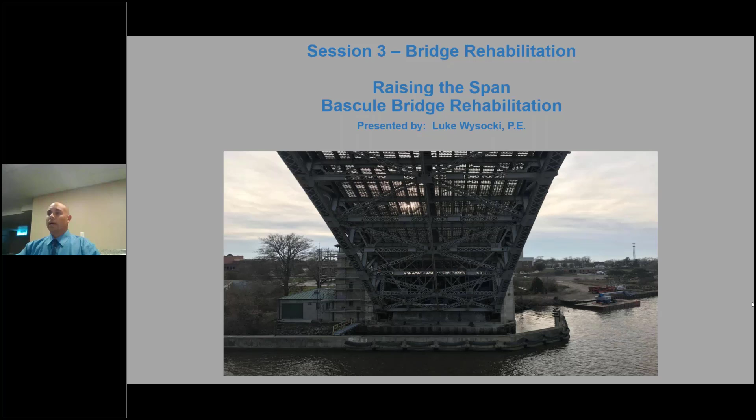Okay, thank you everyone for joining us today. As Mike said, our first presentation is titled Raising the Span, about a rehabilitation of a bascule bridge in Lorain, Ohio. The project we're going to be talking about today is project number 2 of 18, Lorain 6, 9.67. You can see where the pin is dropped on the aerial view here from Google Earth. This is the US 6 bridge over the Black River in downtown Lorain, Ohio.

To the north is the mouth of the river, right at the shores of Lake Erie. To the south, you have several marinas, a steel mill, and a large Lafarge aggregate facility, and those facilities receive a number of bulk carriers to bring goods in throughout the season.

The background on this structure: it was formerly known as the Erie Avenue Bridge. The structure was renamed in honor of former U.S. Marine Charles J. Berry, a Medal of Honor recipient in World War II. As stated, it carries 4 lanes of US 6, as well as 2 pedestrian sidewalks over the Black River in Lorain, Ohio.

ADT is approximately 14,000 vehicles, and the structure was opened in 1940, so it just turned 80 years old. The total structure length is 1,052 feet, and to the west there are 8 approach spans. To the east there is 1 approach span, and on either side of the river we've also got pier buildings where the operating machinery is housed, and the double leaf movable bascule span itself is 333 feet.

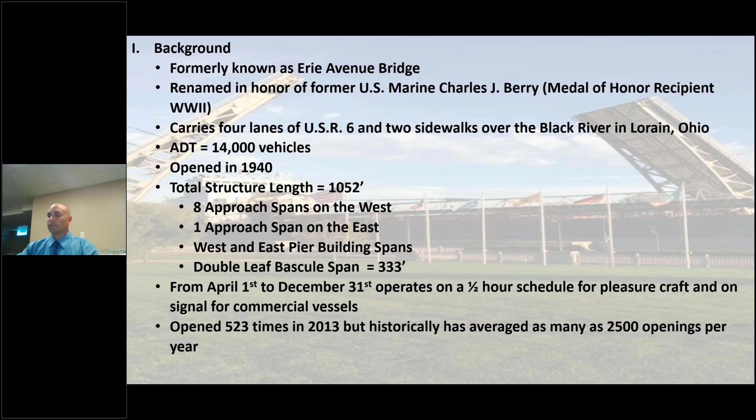So a little bit more history of the maintenance and repair of the structure. Any structure is going to require maintenance during its life cycle. A bascule bridge comes with additional maintenance due to the complex mechanical and electrical operating systems. From the time the bridge was opened in 1940 through the 50s and 60s, the only maintenance was primarily some painting of the structural steel.

In the late 1980s was the first major rehab on this structure, which included replacement of the approach span, deck, and sidewalks, as well as the electrical system, motors, and brakes. The structural steel was also abrasively blasted and painted. Then in the late 1990s, another major rehab job included work on the stone masonry on the pier buildings, a new fiber optic duct cable connecting the east and west control towers under the channel, and a new maintenance building. Finally, in 2012, the east and west counterweights were adjusted to balance, which brings us to our current project today.

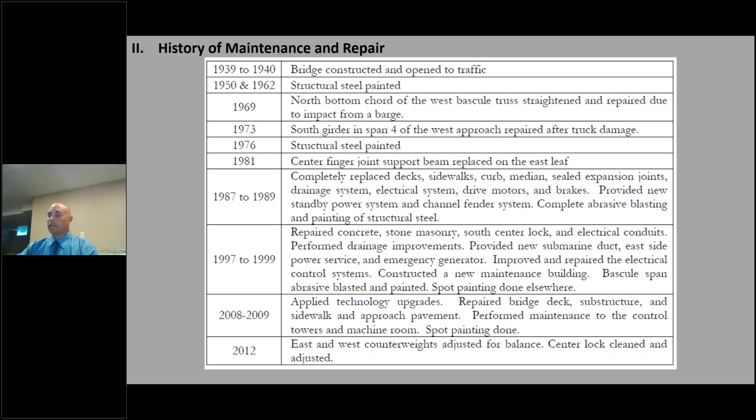For project 2 of 18, ODOT is the owner and was charged with contract administration. The department hired HDR for construction engineering and inspection, as well as submittal reviews. There were hundreds of submittals on this project for replacement of the mechanical and electrical operating systems, requiring a great deal of technical knowledge and expertise to review. Hardesty and Hanover was the designer of record and was invaluable during the project, with over 200 RFIs submitted, reviewed, and answered as construction proceeded. And finally, last but not least, Ruhlin Parham joint venture was the prime contractor for this project.

The purpose of this project was to address structural deficiencies, to provide a minimum 50-year service life for the structure and machinery, as well as a 20-year service life for the electrical and operating systems.

Part of the structure work included overlays on the approach span decks. The existing approach spans are comprised of a 4 1/4-inch galvanized steel grid with a 6-inch superplasticized dense concrete fill. We did hydro demolition of 2 inches and replaced it with an SDC overlay. The plan also intended a 1 1/4-inch hydro demo and SDC overlay on the sidewalks. However, that was unsuccessful - we kept punching through with the hydro demo equipment, so we ended up doing some sidewalk patching with latex modified concrete.

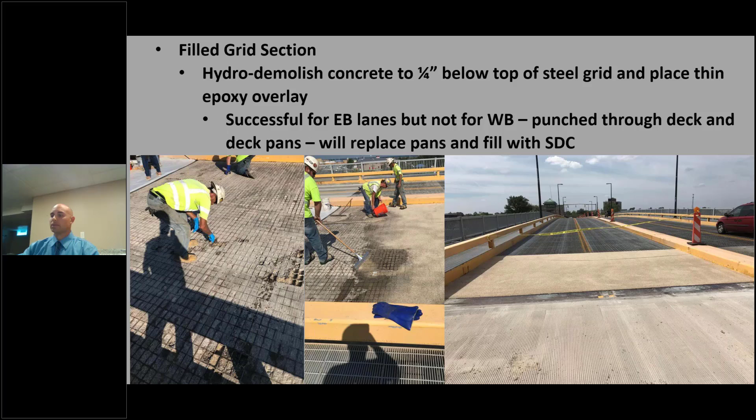As mentioned, the intent of the project was to bring the bridge up to today's standards for live loading. Some of the structure strengthening on the approach spans included strengthening the floor beams with angles placed at the top and bottom of the webs. This involved a very tedious process of drilling a large number of holes to bolt these angles to the floor beams.

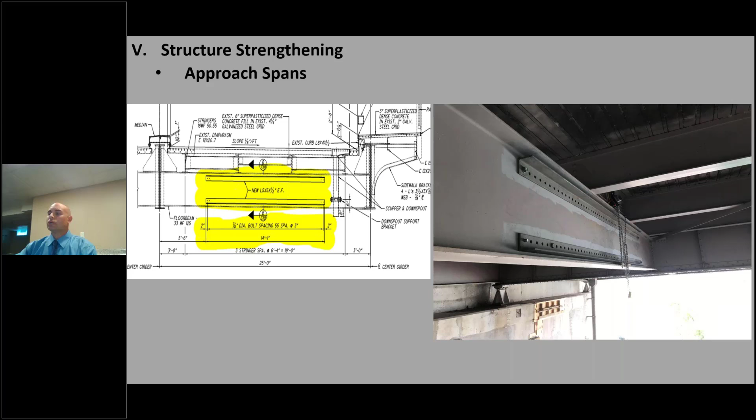Some of the other strengthening that took place was on span 8 and the center girder, which included adding new cover plates and splice plates to the top and bottom of this girder.

Finally, there was some structural steel strengthening out in the bascule spans. This was definitely one of the more challenging aspects of the work. You can see from the photos all of the work taking place from barges on the river, and we were certainly at the mercy of Mother Nature there. Being near the mouth of the river at Lake Erie, the river levels fluctuated greatly with the lake as well as wave conditions, so there were a lot of days where it was difficult, if not impossible, for this work to take place out over the river channel.

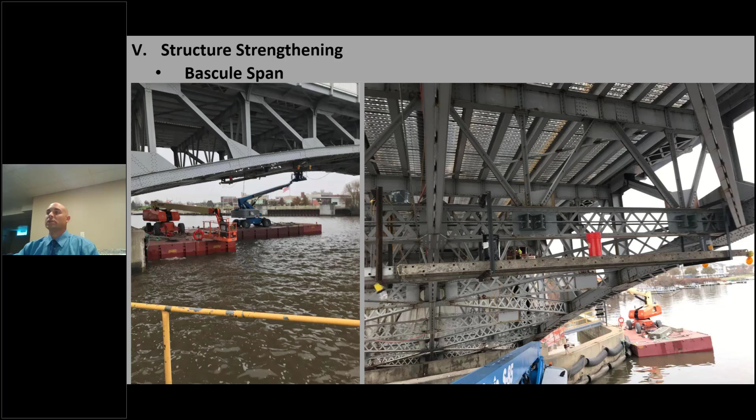As mentioned, this is a historical structure. The control towers and pier buildings have sandstone tiles placed on the exterior. Part of the work was architectural stone repairs, including removal and replacement of stones, patching with a Jahn mortar, profiling to remove delamination, and finally chemical cleaning to remove an existing sealant and give a clean, finished look to the stone.

In the next photo here, you can see some of the architectural stone repairs in progress. The photo on the left shows the extensive scaffolding required to access the work, and on the other control tower on the right, you can see some of the profiling work in progress.

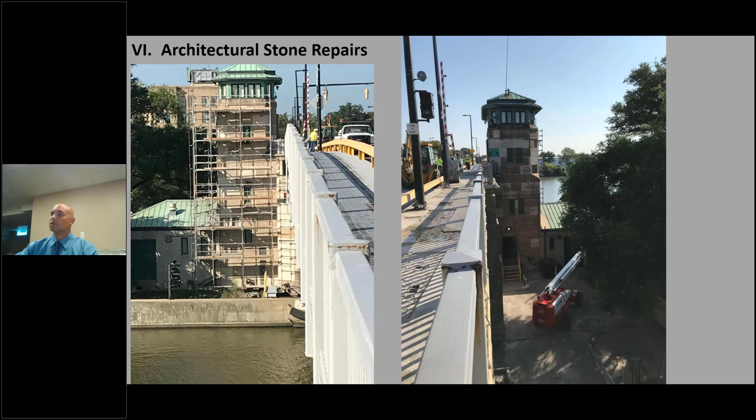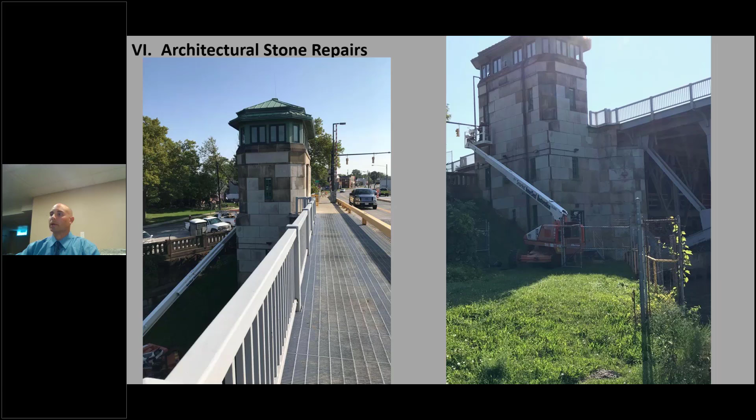Here's another view of the control towers with the masonry profiling work completed, prior to the chemical cleaning of the stones. We did chemical cleaning to remove some of the existing sealer placed in the late 1990s, and also to remove impurities and deposits from the air that give it that dirty, tarnished look. These photos were taken before the chemical cleaning, but the intent between that and the profiling was to give the structure a uniform look and preserve the historical integrity of these sandstone tiles.

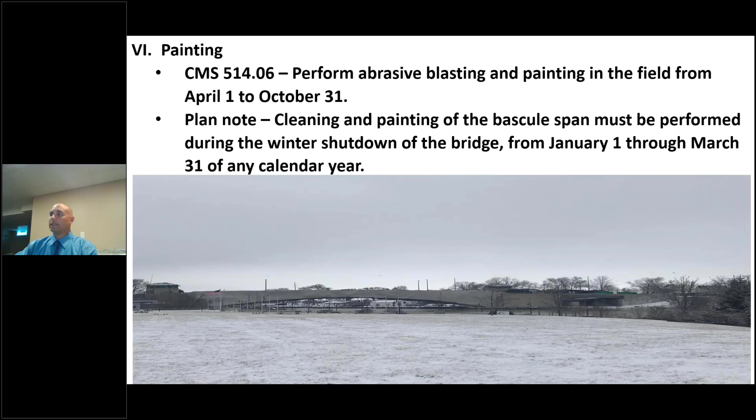Another unique aspect of this project was performing structural steel painting during the winter months. Matt will get into some of the challenges with this in his presentation. The intent here was to take advantage of the winter months when there's no shipping on the Black River, but still maintain vehicular traffic. In the past, when the structure was painted, the Bascule leaves would be raised, closing vehicular traffic so river traffic could be maintained. This is very disruptive to the general public because it's a long detour to get to the other bridge that crosses the Black River. So the decision was made to do the structural steel painting during the winter months.

Now I'll get into another unique aspect of this project, the temporary operating system. The intent behind this was to maintain operation of the bridge during construction. In the past, when mechanical and electrical work was done, the Bascule leaves were raised and locked into the open position so river traffic could be maintained, which was very disruptive to the general public. So this project was designed with a temporary operating system instead.

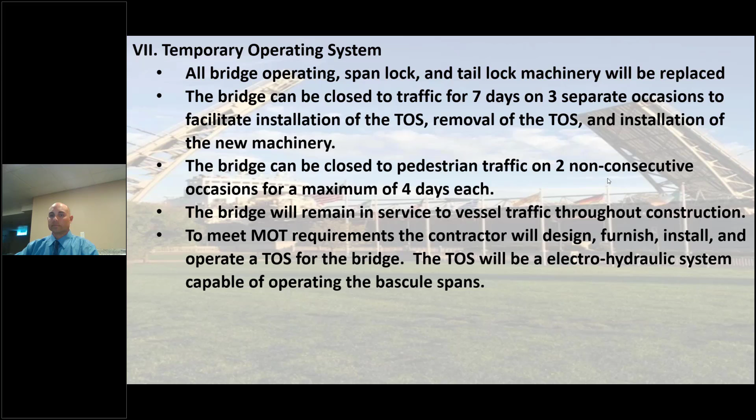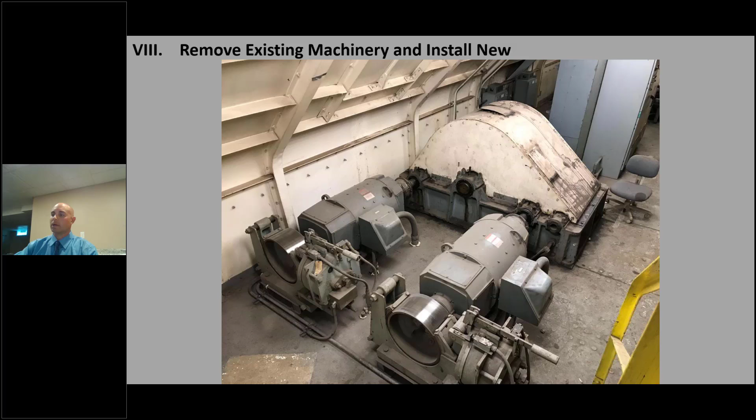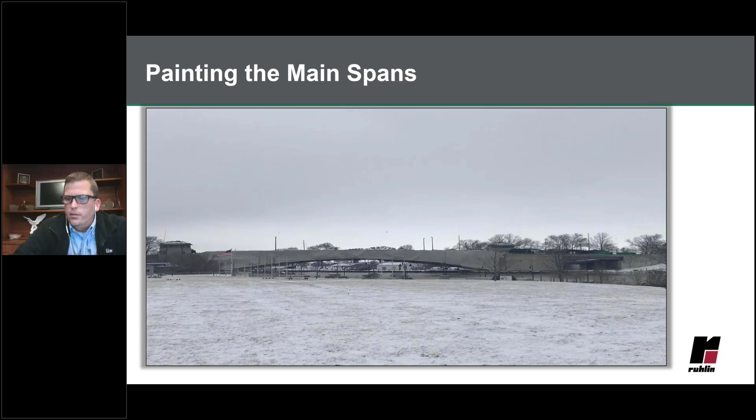Because of that clause that we thought we might have to open the bridge with 12-hour notice, we initially tried to do the containment so it would be operable with a bridge opening. But that was just not possible, and plus there's a whole balance issue with trying to do containment. So we were able to work with the Coast Guard and the local businesses, and for most of the closure period, we were assured that there would be no bridge openings.

So was the painting a challenge? It absolutely was. Did it go as planned? Absolutely not, but I will give it to the painters. We were able to do this with some complex sequencing and a lot of pushing, but it did get done.

The next apparent challenge was the installation of the temporary operating system. And if this wasn't a challenge enough, we had to get the TOS installed, integrated, and operable by the same deadline as the painting. So when the painting was off to a slow start, we knew on the back end there'd be less time to get the TOS installed. That was... wasn't a lot of fun. Luckily, us engineers don't worry about that stuff too much.

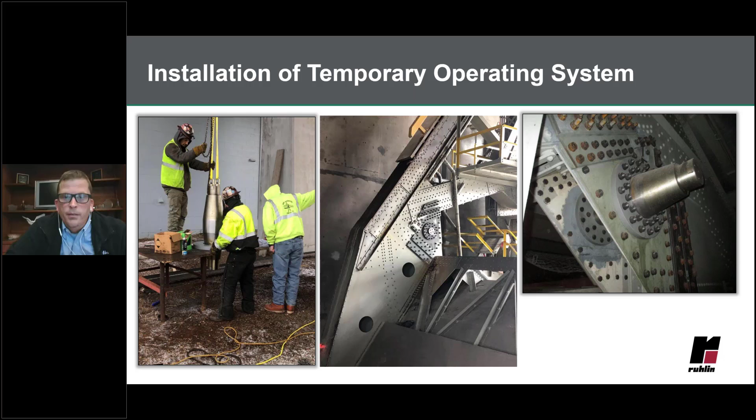This is the middle picture. It shows the trunnion in place in the actual bascule truss. Part of the evolution of this design is we actually had to add more reinforcement to the truss. And with more time, the TOS itself would be just its own standalone topic for one of these presentations.

So was the TOS a challenge? Definitely was, but we have a good team here at Ruhlin, and even in the condensed schedule, we were able to pull it off in time.

And the last of the obvious challenges was the machinery alignment. At the time we were bidding this job, I was actually on another Bascule bridge, and we were having a monumental struggle with the open gear alignment. So anytime you're aligning new components to old components, there's always a challenge, always a risk.

And there's always a running joke when you struggle with the alignment on these machinery components. Well, it's a joke - I don't know if the owner always finds it funny. Like, don't worry about getting exact alignment, it'll eventually wear itself in.

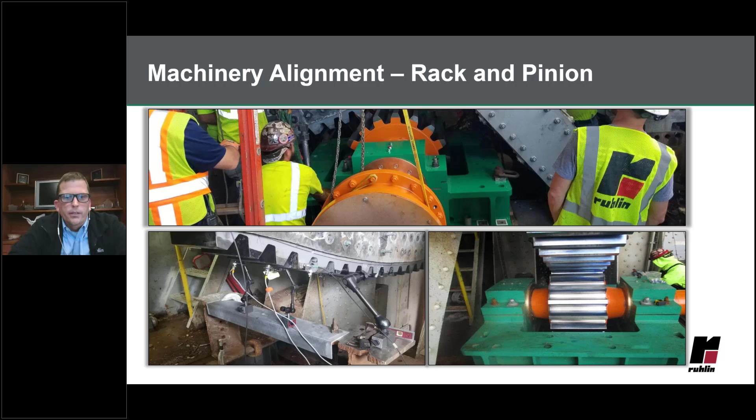And for the existing span locks, they were definitely well worn in. These were a challenge in the fact that we were connecting two separate structures with a new piece of machinery.

And over the course of the last 40 years or whenever these have been changed, there were quite a lot of iterations. So this is just another example of the risk the contractor takes. You really can't tell just how bad things are going to be until you rip the old system out.

We had a lot of iterations of changing rear and front live loads. And the old system actually pulled the leaf down into contact, which we were not allowed to do with the new system.

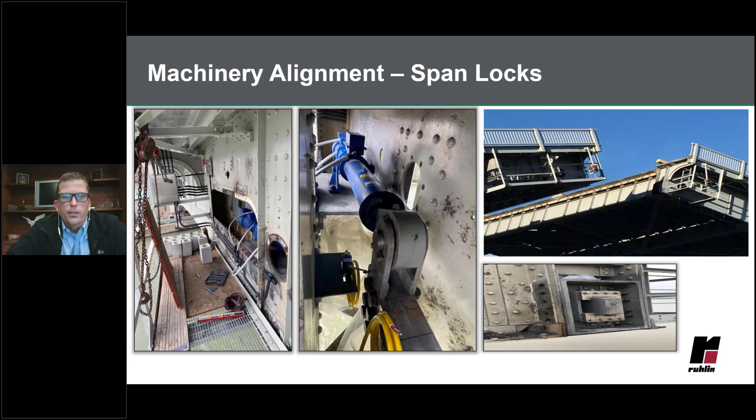And there's just a few more pictures of some of the machinery alignment. The left is a picture of the span lock. In the middle, it's just an interesting picture of one of the primary reducers. And that has nothing to do with alignment, but that machinery room cover that you see on the right was quite the challenge. So all these challenges were fairly obvious going in, and they were a challenge.

The alignment of this machinery actually went better. The design was very good. It used a primary differential reducer, which was much more alignment friendly when compared to some of the other designs we've used. And we also employed Bob Polsett from Stafford Bandlow Engineering, which made this process go very well.

So 3 obvious challenges, all were a struggle to some degree, but went well. But the less obvious challenge that you cannot identify from just looking in the plans was we had no idea how we were going to get each of these components into position.

Now, none of these components are that big to say setting a bridge girder. The racks were 22 feet long and 12,000 pounds. The secondary reducers weren't huge by any standard - they were 6 feet tall and weighed almost 20 tons. And we routinely handle things this large or larger, but how to get these into the point of installation became quite the planning session.

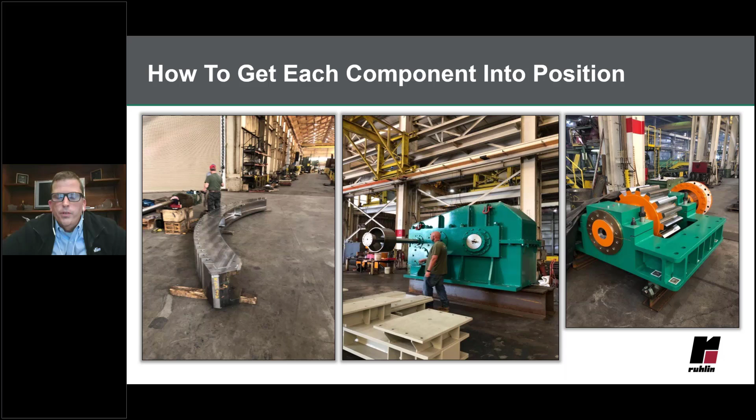We determined there were 2 possible routes to get these components to where they needed to go. First one was through the pier house and across the counterweight pit.

So they had to go through the double doors in the picture on the left. Then once through the double doors, drop 25 feet down to the counterweight pit floor. And then across the counterweight pit floor to the trunnion tower, up another 25 feet through the laterals of the trunnion tower and then into the machinery room.

All this had to be done with no crane and inside of a room that's periodically completely filled with 2,000 tons of steel and concrete counterweight. So we quickly deemed this path impossible.

But with the lack of road closures and trying to do this with just traffic stops, we figured we'd have 15, 20 minutes, half-hour tops to try and bring in a crane, and still we had to struggle to get underneath the bridge. So we abandoned this idea pretty quickly and pretty much determined that the impossible path was the way to go.

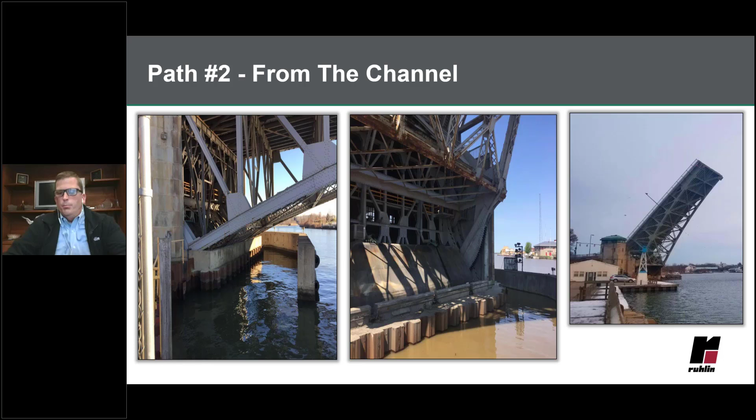So this turned into quite the planning session. Many ideas for how to get the machinery through the pier house. We thought of an upper track system using Hillman rollers to mighty mini jacks on a lower track system, a ramp down to the counterweight pit floor, highline systems, chain hoist, air tuggers, and a conveyor belt system.

We even came up with a temporary false work rail system, kind of like a mini roller coaster inside the pit, a rolling gantry on the pit floor, and an overhead crane. All those had problems, and once you got it to the floor, you still had to move it.

So we thought about maybe industrial forklifts or air dollies. Then we had an idea: maybe we can just sub this work out. So we called in a specialist in industrial equipment moving and brought them out to the site. They looked at it for about 20 minutes and told us they had no idea how they would do it.

So that was over. Then we thought maybe we could get some specialty equipment, particularly equipment named after animals. We checked the spider crane and something called a platypus, which was some compact tracked container mover our superintendent saw somewhere. So we tried all of these things, a combination of all of the above, but no matter what we tried, none of these things could solve all the problems we were looking at.

So this went on for a while, and we were stymied for a while. We even got bonus time to be stymied, as the project had a fairly significant delay trying to find a domestic manufacturer for the brakes. But we did finally have a breakthrough and the ingenious and highly technical solution.

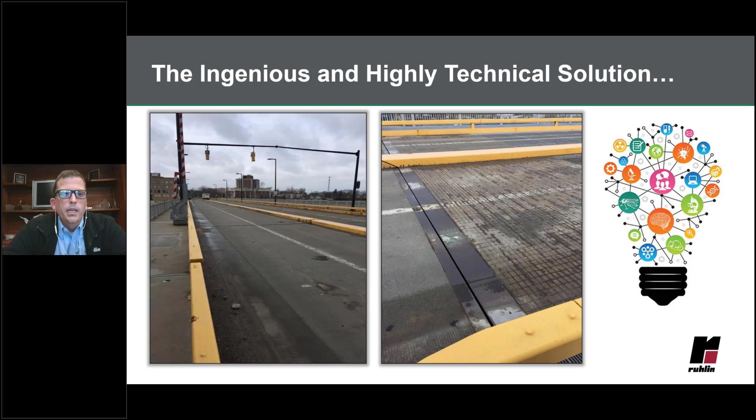Let's cut a big hole in the road we just repaired. I'm not totally sure who came up with this idea, but since I'm the only one speaking today, I'm going to take full credit.

Even this idea was not without its problems, as the machinery room, as Luke mentioned, is not directly under either of the spans. It was right on the joint, the transition from the lift span to the fixed span. So this required quite a lot of removal of the steel we just repaired and painted. But we were pretty happy that we finally had a working solution.

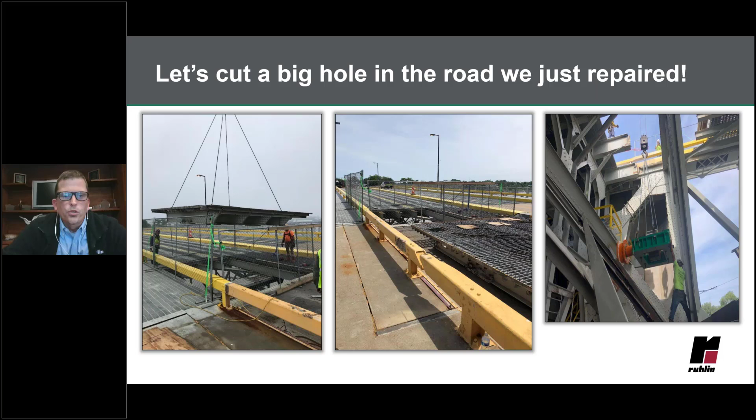And here is a few pictures of the rack placement from the hole in the roadway.

And just getting the racks into the counterweight pit wasn't actually enough, because there was a lot of work afterwards. We pretty much left it up to our iron workers to do a lot of rigging and a lot of different moves with different rigging setups. So I'll give them most of the credit.

Once we got it to the floor, at least for the racks, they were able to get the stuff into position in very short windows between bridge openings.

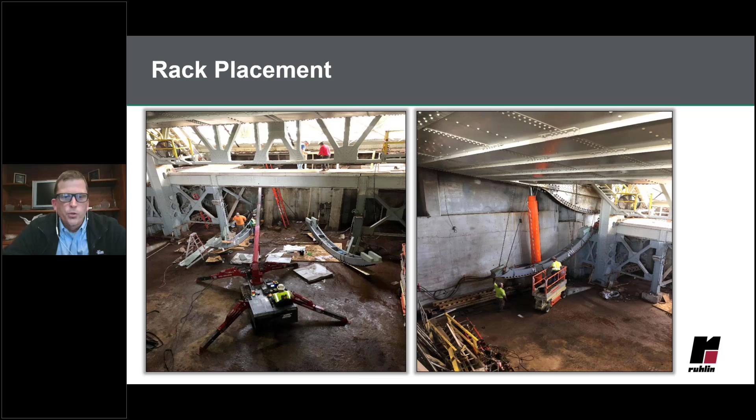And the tightest fit that we had was for the secondary reducers. We had about 1/16 of an inch clearance to get these into the hole. And while I make fun of this solution as not glamorous, it did create quite a bit of engineering.

Because even once they were into the machinery room, they were all offset from the center line. So moving a 20-ton reducer with no overhead crane is much easier said than done. There was a pretty complex system in the machinery room with Hillman rollers and a lot of complex rigging.

And then lastly, this was the main operating machinery going into the machinery room.

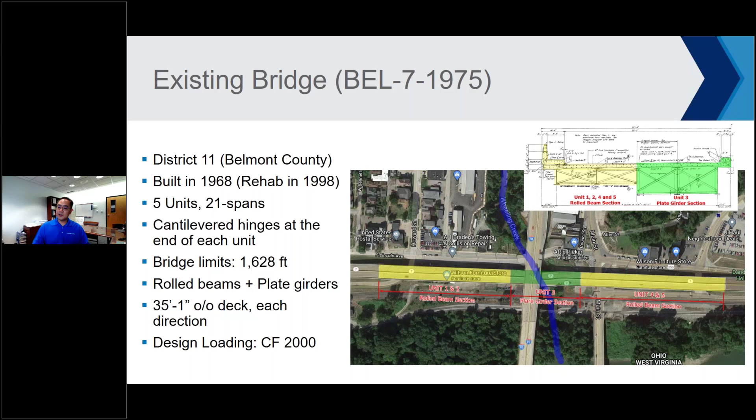The Belmont 7 Bridge project has been carried out in 2 stages. First, we did a temporary pier cap strengthening design until they are replaced with a new pier cap or the bridge is replaced. Second, we studied the bridge rehab and replacement.

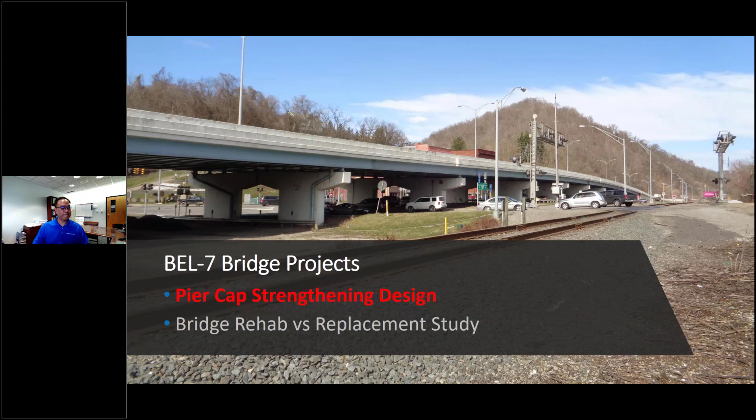Today we'll talk about the first topic, the pier cap strengthening design. After more than 50 years of bridge service, many of the pier caps were found to have serious cracks and deterioration. Some pier caps have a very large area of delamination and spalling, and abutments have a tilting issue. Severe deterioration was also found at the top of the pier bearing seat. So ODOT decided the pier cap needed to be repaired.

This is the typical vertical cracking happening in most piers. This is Pier 8 eastbound, looking at the rear side of the pier. As you can see, the bad concrete area was already marked up on the pier cap from a previous inspection, so we could easily see the limits of the concrete delamination.

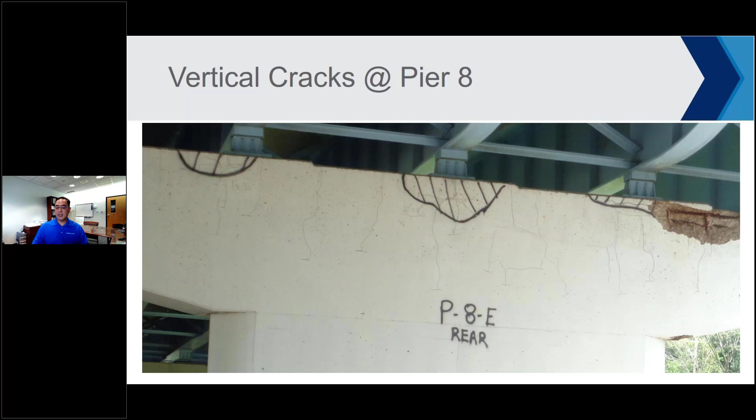This is Pier 11 westbound, looking at the front side of the pier. Same as other piers, there are lots of vertical cracks on the pier cap. This is Pier 16 eastbound. These vertical cracks were found to be growing over the years, and this vertical cracking was the main reason we needed to replace the pier cap.

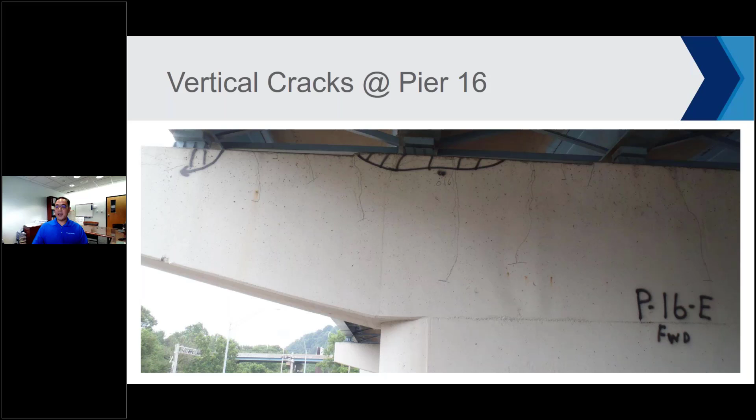So they asked us to study several options for short-term pier cap repairs and prepare the construction plan as soon as possible. ODOT selected 6 piers for expedited repair: Pier 8, 11, and 16. There was also a transverse crack along the face of the pier cap, so we could not apply pre-stress force under this condition. We'll talk about in more detail later how we handled this problem.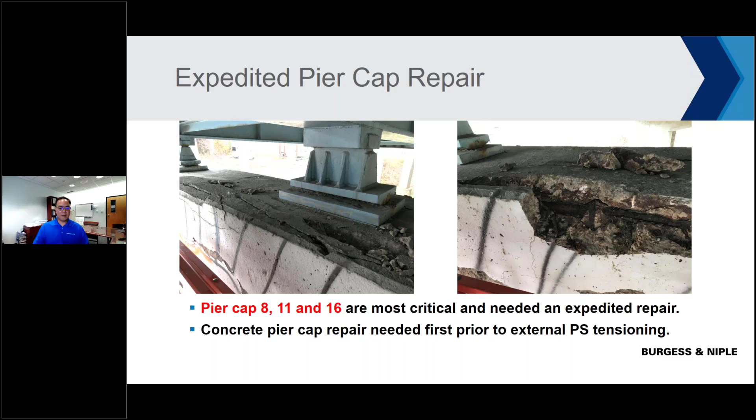We considered supplementary support members taking care of most of the dead load and live load, so we tried to minimize using the existing pier cap capacity if possible. We proposed 3 different types of temporary support options: steel frame type support, steel beam type support, and external post-tensioning support.

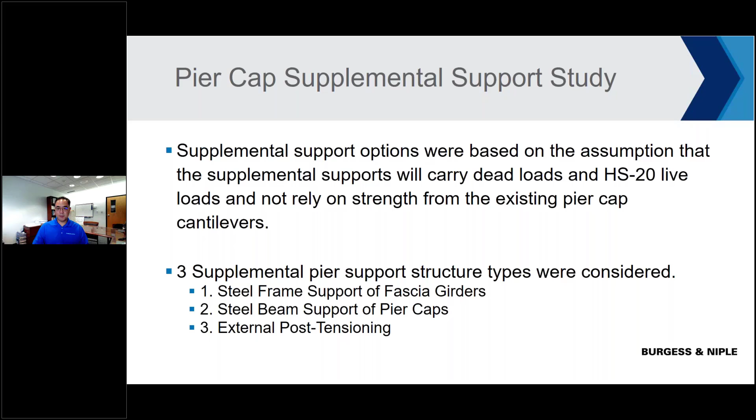This is the first option we propose for temporary support. It's frame shaped and supports the girder adjacent to the existing pier. We put two 14-inch H-pile columns on top of the pier footing, and then place the wide flange steel beam to support the existing fascia girder.

One of the benefits of this method was it does not need to repair the existing pier. However, this method changed the support location from original design, so it can cause tension stress on the top of the deck slab.

Another option was a bigger size steel beam with support brackets. We can attach the bracket on the pier column to support this beam. It uses fewer members than other methods, so it's relatively faster construction, but because of the heavy support beam, it could add serious extra dead load on the existing pier. Also, it's not easy to drill the hole without cutting the pier column reinforcement, so that might be a problem.

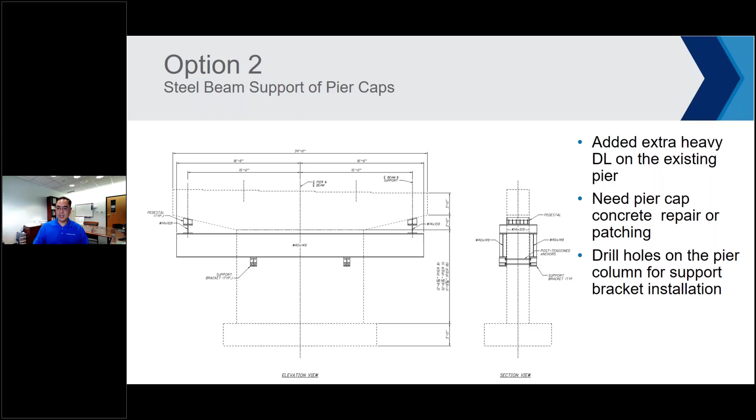The third option was external post-tensioning, and ODOT selected this method. They basically installed an anchor plate on each side of the pier cap and applied post-tensioning force on the existing pier cap using 6 high-strength post-tension bars, so it can increase the existing pier cap capacity. This method resulted in the least dead load on the existing pier when compared with the other two options.

Based on the engineering cost estimate for this method, total construction cost was about $300,000, and the award amount was $228,000.

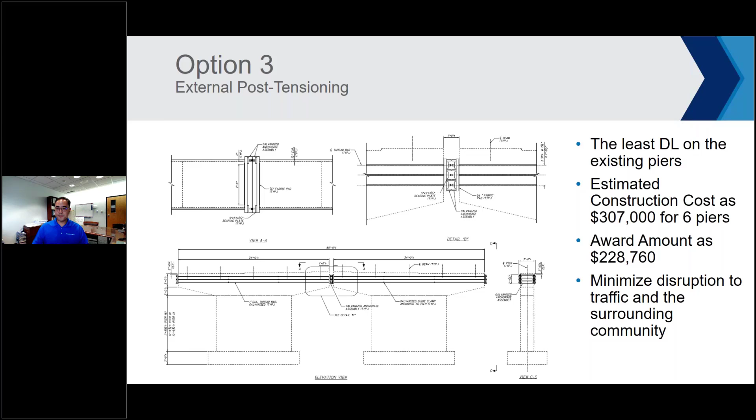Existing bridge analysis: to calculate the initial stress force, we had to know how much dead load and live load force were working on the existing structure. So we modeled the superstructure using Midas and calculated all the reaction forces at each pier. Based on this reaction, we did a quick check for the bearing capacity, and it seemed over 90% performance ratio, which was okay.

We already knew that many Asian countries like South Korea, Japan, and China have been using this type of construction for a long time. So we thought it would be very easy to find a similar case here, because this situation could easily happen here, and this method was not that difficult or a special thing.

So before we started work on this project, we looked up the ODOT archive or historical project database to see if we could find a similar project like this, but unfortunately, we couldn't find it.

Generally, in Asian countries, as design live load became heavier over the years, bridge owners wanted to upgrade existing structures for higher performance. So in such cases, they have been using this type of method for pier cap retrofit.

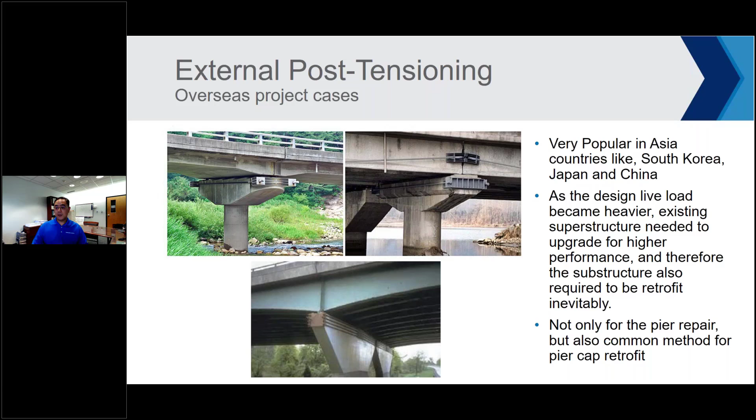This screen is a rendering image to explain how external post-tension bars work on the pier cap. Basically, you install the anchor bracket or anchor plate at each end of the pier cap and then post-tension with a high strength bar or strands.

One thing I noticed is that they use a saddle bracket at the top of the pier cap, so it could push more pre-stress force onto the existing pier cap. They also use this method sometimes for temporary conditions, but sometimes for permanent construction as well.

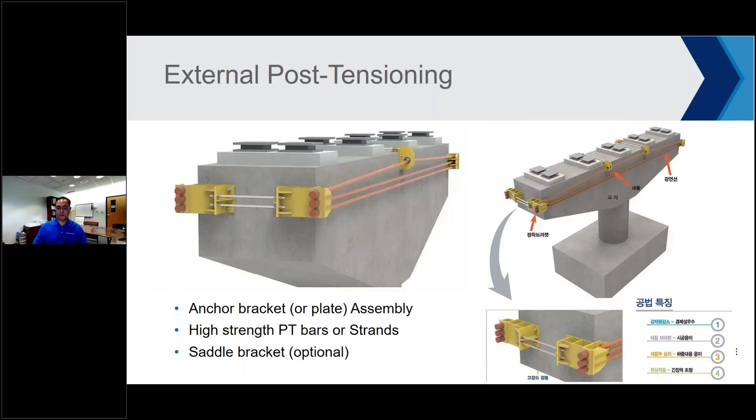So I did some internet research and found a similar project in the US. This is the George Wade Memorial Bridge located on I-81 over the Susquehanna River in Harrisburg, Pennsylvania. The bridge was built in 1969, and the total bridge length is 5,200 feet.

In early 2000, PennDOT figured out the pier cap reinforcement was not enough to handle the current traffic load of 32,000 vehicles per day. They also found vertical cracks on the pier cap, the same as the Belmont bridge. So PennDOT decided to repair this pier cap structure.

The retrofit work was done in 2010 by Dywidag-Systems International. They used 6 post-tension bars with a diameter of 46 millimeters. They retrofitted a total of 68 piers, 34 piers each for northbound and southbound.

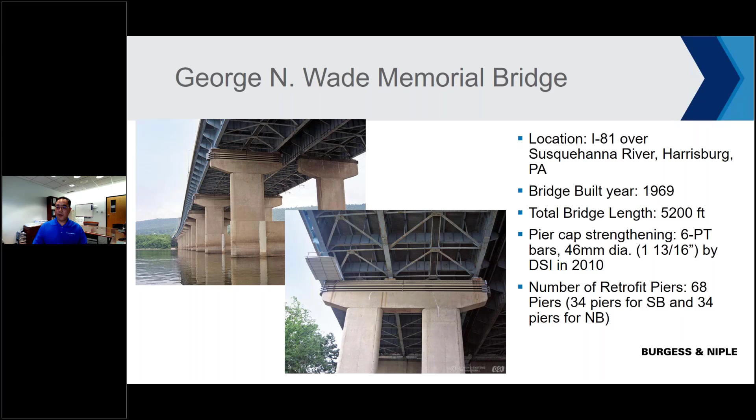Now let's talk about the design procedure. We calculated all the dead load and live load reaction from the existing bridge and decided the size and number of post-tension bars. We also created the existing pier cap model using Midas and applied all the loads.

Then we checked the pier cap concrete stress. Once it passed, we checked the stress for the post-tension bar and then the angle plate assembly.

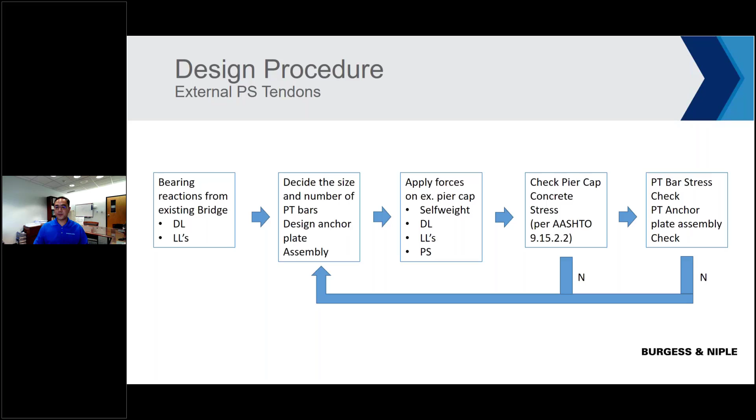After calculating the reaction and the post-tension force from Midas, we imported all the member forces into the spreadsheet. We created a macro to run with the code-checking spreadsheet and then calculate the final concrete stresses.

In this spreadsheet, it basically checked the existing concrete factored moment and the concrete service stress, as well as the post-tension bar tension stress. For concrete stress checking, we have to check all 3 different cases of concrete stresses per AASHTO code.

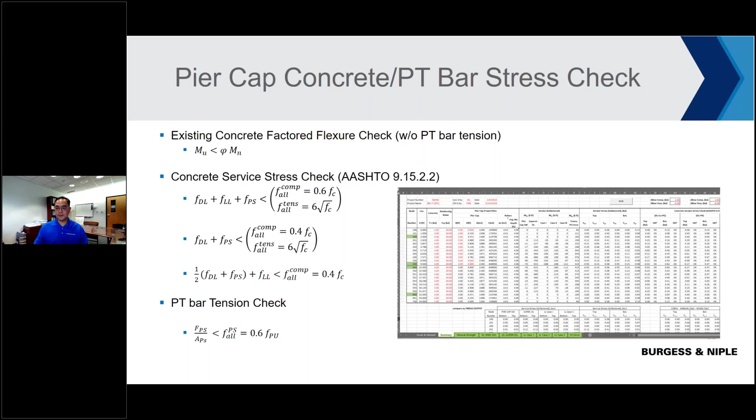Once we finished the pier cap concrete stress, we had to check the anchor plate assembly next. We took a middle section of the anchor plate, shaped like a cantilever with a T-shaped section, and then applied half of the prestressed force on it.

This was a simple equation, so we just calculated it by hand. Finally, we calculated all the anchor plate stress at the top and bottom, and verified that everything was under allowable stress.

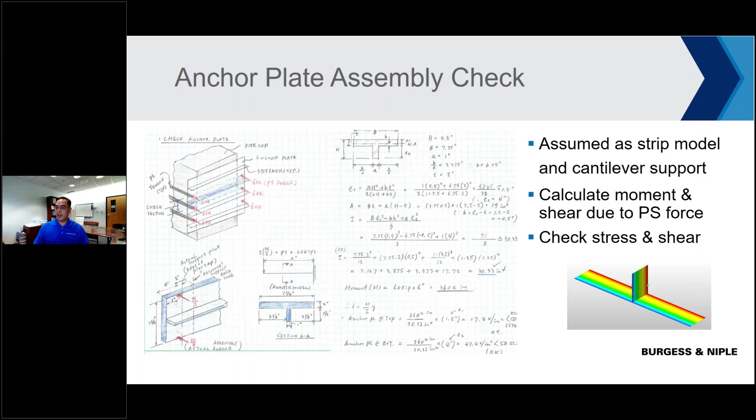In order to draw this diagram, we investigated the entire pier cap to verify if there were additional delaminated areas. Some of them looked good with no marks, but when we tapped them with a hammer, we found some additional delamination, so we had to include this in the concrete patching diagram.

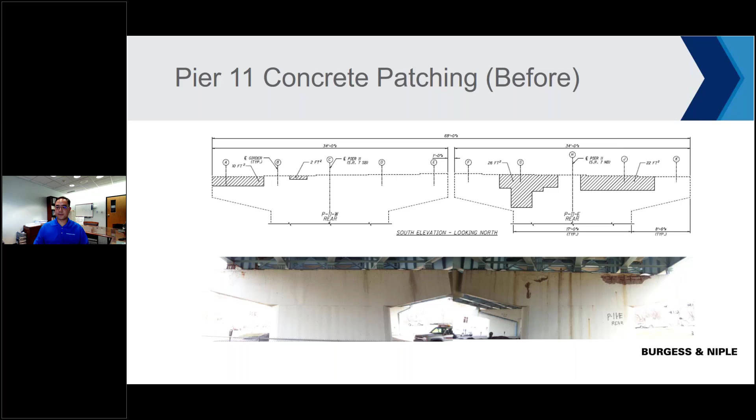Another thing we found at the bridge site was that the end of the pier cap concrete surfaces were not flat and smooth. Mostly the gap was between 1/16 inch and 1/4 inch, so we provided some detail in the construction plan.

If the gap was greater than 1/16 inch, then the concrete shall be ground to make a smooth and nice flat surface.

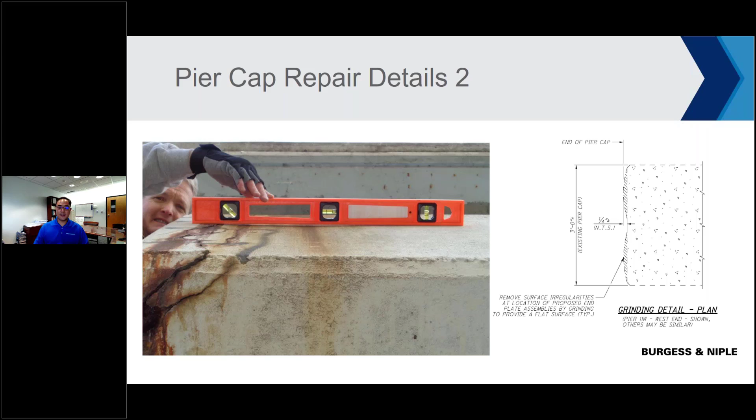Even though we ground the pier cap concrete surface to make it flat and smooth, we used a fabric pad for better contact between the end plate and the concrete surface. The pad thickness was 1/4 inch, and the material was the same as a typical preformed bearing pad per CMS.

Regarding the post-tensioning bars, we used 3 high-strength post-tension bars at each side. Grade was 150 KSI steel, 1 inch diameter, all-threaded bars. Total final jacking force was 60 kips.

First, we used 15 kips for initial jacking force for each bar, and then finished up the jacking force at 60 kips. So we had 2 incremental jacking stages.

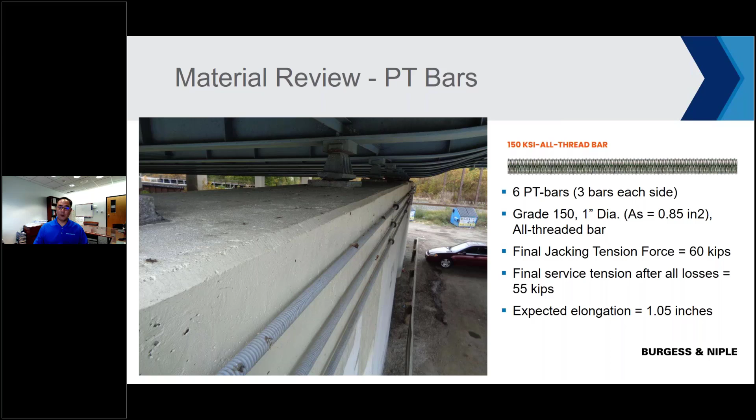We installed a bar clamp to prevent sagging due to the post-tension bar's self-weight or possible vibration. This was a typical clamp used to secure pipe to a wall. The rubber bushing was a little bigger than the post-tension bar, and the clamp was made of stainless steel.

We used 2 of these clamps along each post-tension bar. Also, we used a 3/8 inch diameter anchor bolt to secure this clamp.

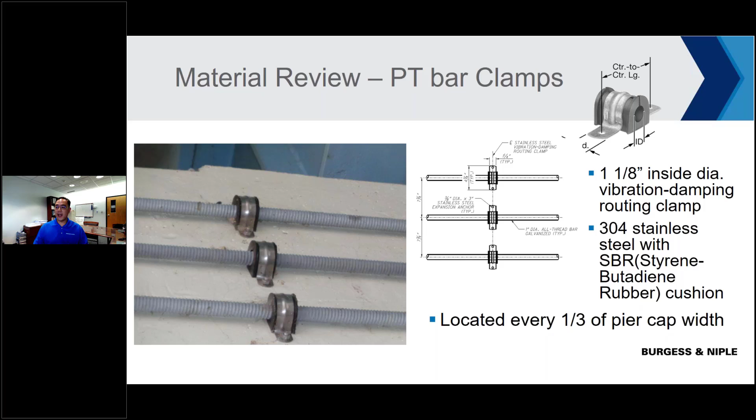Another design challenge was we only had a 1 foot gap between the end of the pier cap, so we had to design the anchor plate assembly to be less than 6 inches for each side. We ended up designing it to make it work, with 1/2 inch clearance between the stiffeners. So, to be honest, we were worried about it.

The contractor had to fabricate this assembly exactly to the plan and install it precisely because the pieces were almost touching each other. When we revisited the bridge site after construction, the contractor did a really good job, and we were very happy with that.

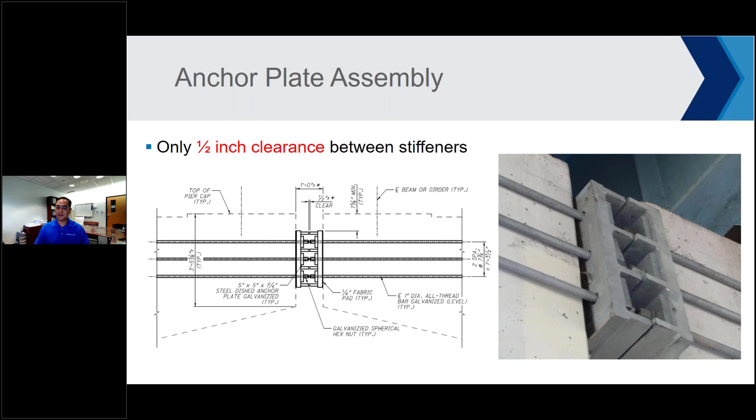So this is the picture. All the installation has been completed for Pier 8. And this is Pier 11. And this is Pier 16.

As you can see in the picture, it was a very simple design and a very effective repair method. It was also relatively easy construction. So I guess this was the perfect solution for this pier cap repair problem. In this project, we used this method as a temporary repair for the pier cap, but I think we can definitely use this method as a permanent method as well.

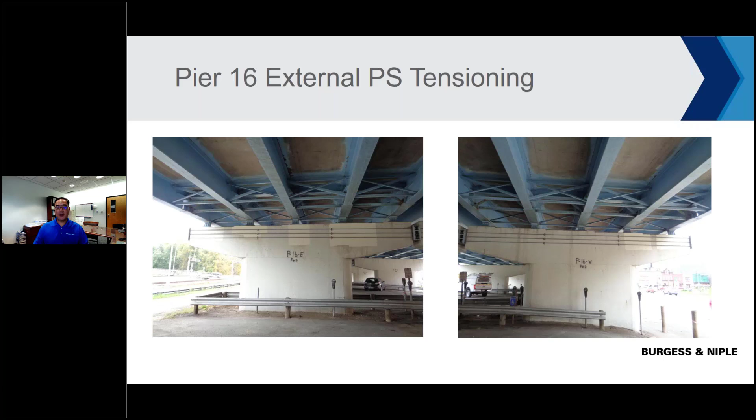One more thing we'd like to share is a reference report. This is the FHWA technical report titled Report on Technique for Bridge Strengthening. I think it was published in early 2019, so unfortunately we could not see this report during our project. But basically it talks about how to calculate the capacity and the load rating factor for existing and strengthened pier caps. So this report might be helpful for bridge engineers who use this pier cap strengthening method, or load rating analysis for this type of pier cap.

So this is all I prepared for today. I know it's a very short time, so I definitely did not show everything, but if you have any questions, you can send me an email. That is the best solution.

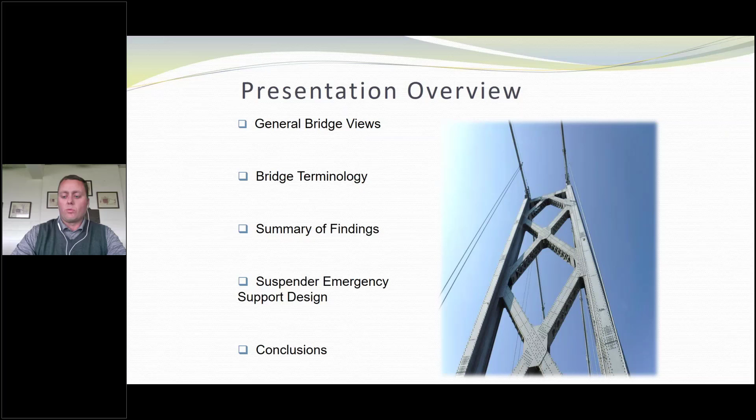There's a couple mug shots of me. I'm the KYTC District 9 bridge engineer for Kentucky. For those of you who do not know where the Simon-Kenton Bridge is, it crosses the Ohio River and connects the city of Maysville to Aberdeen, Ohio. This is roughly located 75 miles upstream, southeast of Cincinnati.

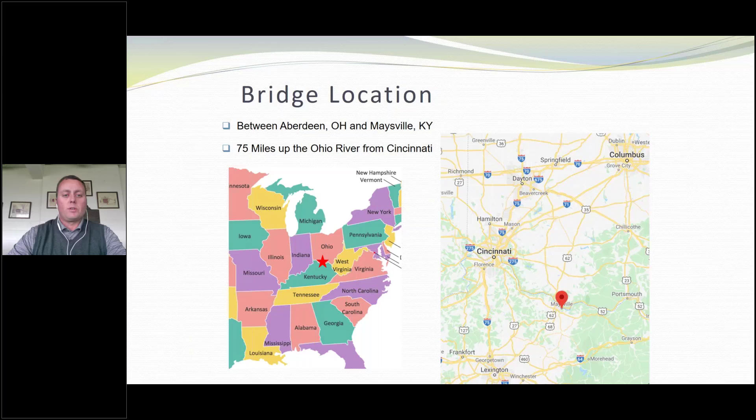A little bridge history: the Simon-Kenton Bridge is a suspension bridge built in the 1930s. Its designer and the fabricator's shop drawing personnel have ties to the Golden Gate Bridge and the Brooklyn Bridge. So it's a historically significant structure.

The navigational span is 1,060 feet. The overall length of the bridge is just under 2,000 feet. The towers extend vertically approximately 125 feet above the bridge deck elevation. It's a narrow 2-lane bridge with a very narrow sidewalk, so narrow in fact you do not walk side by side on this structure for fear of getting taken out by a truck mirror.

The next slide we have here is a typical elevation view, upstream of the structure. On the left you can see Maysville, Kentucky, and on the right you'll see Aberdeen.

It is a fracture critical bridge, and we share this bridge with Ohio, but Kentucky is responsible for the maintenance, the inspections, and letting out contracts for the structure. This structure is so large we do not inspect it with our in-house forces; we consult out, and that's where Michael Baker and Jason Stith come into the picture. So it's actually consulted out every 2 years for fracture critical inspections.

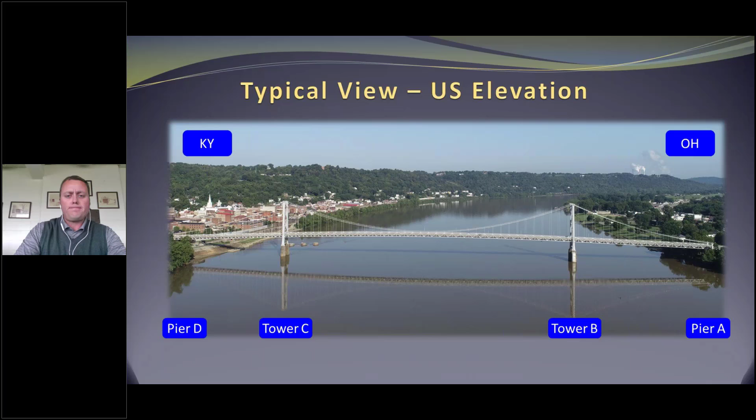The next slide we have for you is labeled with some terminology on the structure. You've got the main cables that drape over top the towers, and then the suspender cables, or secondary cables in question, are actually the vertical cables that drape over top of the main cables and connect to the stiffening truss onto gusset plates on the outboard and inboard faces of the stiffening truss.

One important thing from this photo, it's hard to tell, but it's important to note that the suspender cables form one continuous loop. At the top of the cable it goes over the top of a cable band, so it is not two individual cables, it's one cable. If you cut it in one location, you essentially lose the entire suspender. The suspenders are considered fracture critical. Loss of one of the suspenders means the stiffening truss is not capable of carrying the load between suspenders, so loss of one of those could result in partial failure or complete failure of the structure.

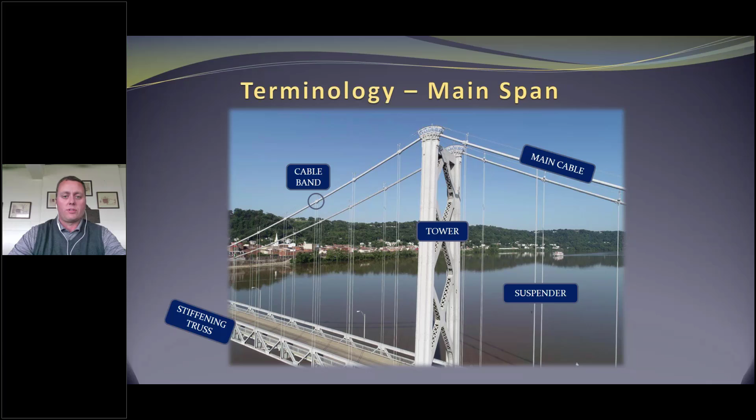Our suspender cables essentially consist of individual wires spun together to create a strand. In our case, for our suspenders, we have one core strand in the middle with 6 separate strands spun around it. So this just gives you a little bit of a visual of what we've got out in the field.

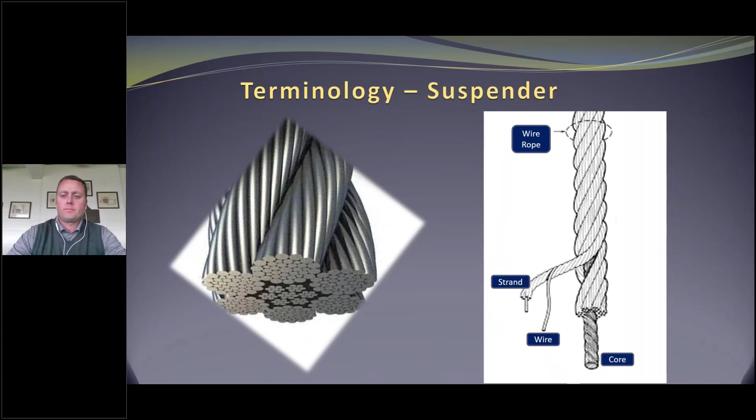A little bit of history behind the bridges: up until 2017, the suspenders really didn't have any major notable defects, just minor defects. In fact, the suspenders were considered in satisfactory condition, with a note that up until the 2017 inspection, at isolated locations, there is pack rust between the housing angles and suspender cables at the stiffening truss connections. The suspender cables also exhibit surface roughness and corrosion at these locations.

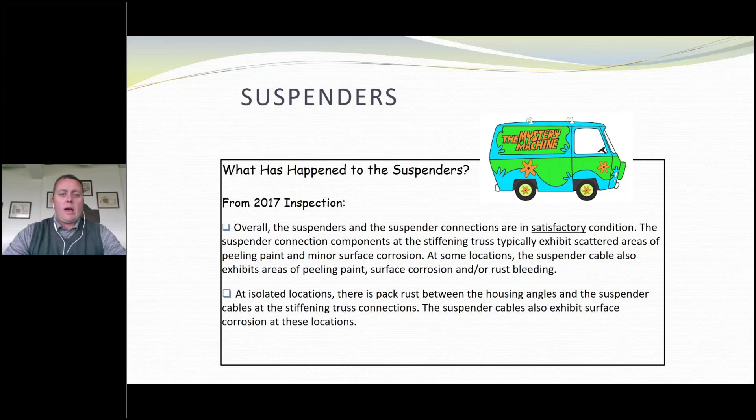At worst, for any bridge inspectors in the room, this would result in a condition state 2 rating if you do element level inspection. I know ODOT is getting ready to move to that - I think Mike's extremely excited about that. Mike Brokaw is.

Just a little summary for those in the room who don't do element level inspection. This is specifically for the element of suspender or secondary steel cables. Condition state 1 is good. Condition state 2 is freckling - rust and corrosion of the steel is initiated, but there's no section loss. Condition state 3 is when section loss is evident or pack rust is present, but does not warrant structural review. Then condition state 4 warrants structural review, meaning that element can no longer carry the loads it was intended for, and an engineering analysis needs to be performed to determine the weight carrying capacity of the structure.

The next slide is a picture of that connection in good condition. As you can see, the paint's in decent condition - it's starting to chalk a little bit, but for the most part we've got no major surface rust and no section loss. That's how we want that connection to look.

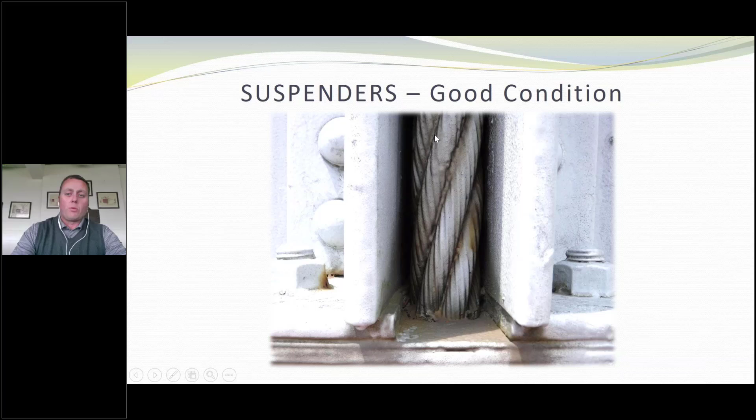The next slide is a couple panel points down from this location, also on the upstream side of the truss at M43. The 4 worst, most critical locations actually all were right in a row, which also gave us a great deal of concern. In this next photo, where the arrows are pointing, it's an isolated critical find present at this location - you can see the cable is bulging. This indicates that the center core, the center strand we mentioned earlier, could be broken, coming undone, or untwining.

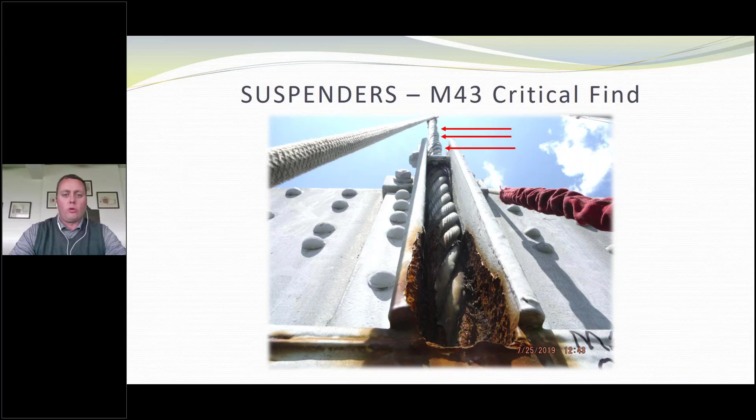Or advanced section loss on the interior of that core strand, but really nothing good is apparent from this slide. We really don't know the severity of it, we just know it is definitely critical. And this location was extended about 2 feet above the stiffening truss, above that anchor house, those angles and the gusset plate.

The next photo we're going to look at is at that lower connection point at upstream M43, and you can see the section loss is very similar to M41, if not worse. This just kind of gives you an idea of what we're coding a condition state for.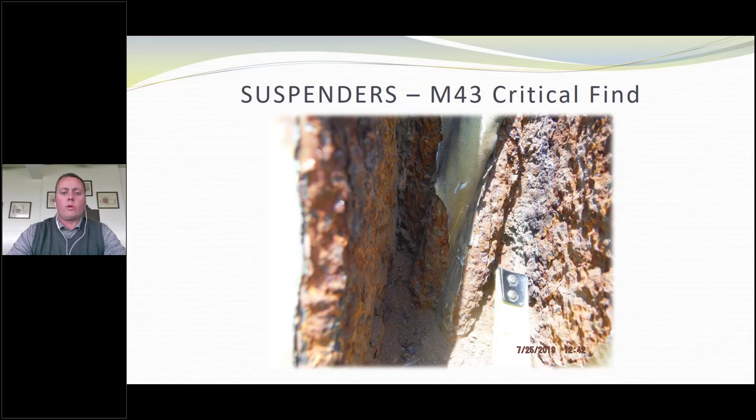So, like any good engineers, we went back to the old inspection report immediately to try to see what happened. Was there advanced acceleration? Did we miss something in the previous inspection? As you can see from this 2017 photo at upstream M39, there is some surface corrosion and some section loss, but I will say there's clear evidence that it has advanced greatly in the 2 years between the inspections.

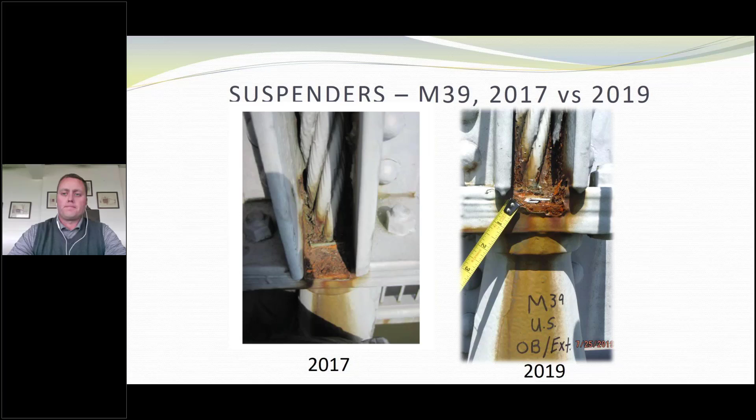What that led us to conclude, this next slide shows what we concluded after the fracture critical inspection was complete: we have 136 suspenders. Up until 2019, all the suspenders were rated in condition state 1. We might have had a little bit of oversight even on my part, that we should have had some in condition state 2, but it's a pretty drastic change to go from 136 in condition state 1 in 2017 to, in 2019, 16 in condition state 4, 23 in condition state 3, 11 in condition state 2, and the remaining 86 in condition state 1.

We put this bridge on 1-month special inspections following this, and by the time we let the emergency contract, we upped it to 19 condition state 4 repair locations, and we ended up closing the bridge in November of 2019, following this July inspection, for a couple of reasons. One, we could not keep truck traffic off the bridge and keep it open at the 3-ton posted weight limit. Two, we also thought we had visual evidence that the bulge at upstream M43 had actually gotten worse within a couple months. So we immediately closed the bridge in November.

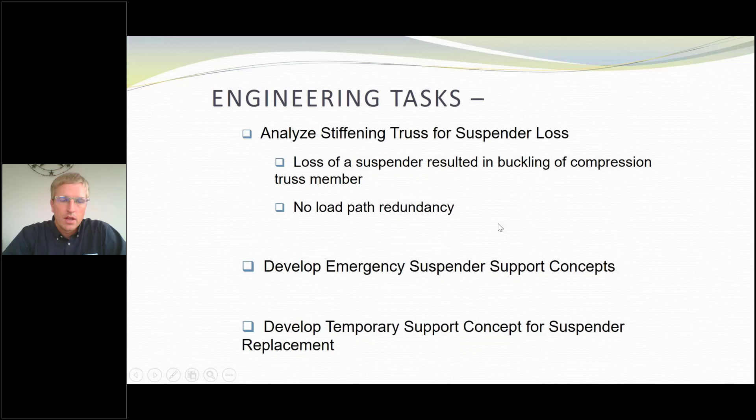Next, we had to develop the emergency detail. I know that probably you don't have a lot of cable structures on your inventory, and for those that do, it's important to note there's not much information in AASHTO for these kinds of things. So one of the things I want to get out of this presentation is to provide some background and ideas of how you can handle these situations.

So basically we went through and said, can we make a rope clamp that could fully support the suspenders and allow for the detensioning that would be used during the replacement, or in this case as a backup belts and suspenders of the existing?

But because of that, this problem is not something you'll find in AASHTO. So I want to spend just a few minutes describing how we designed this, and if you needed to do something similar, how you would go about this. There is some information in Euro codes we were able to find on the design requirements for this, and it's very helpful. It allowed us to feel confident in what we were doing and how we came about our answers. Essentially, we're going to take that clamp, some plates, and cut a groove down the center of it. That groove should be slightly larger than the cable, and you can see those requirements that the Euro code uses.

In addition, you want to have most of the cable encased in that groove and resisting the friction. You don't want to have it kind of pinching on just one side. So to have that total angle, or alpha, that you see in the picture, it should be greater than 250 degrees—again, a requirement that helps ensure we're detailing this correctly.

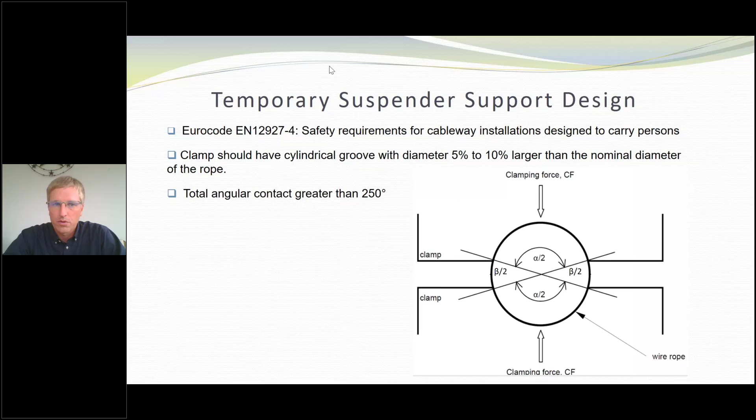Use 0.16 for your friction coefficient. We also found some research that New York DOT had done for a similar system, which found a friction coefficient of 0.27. We went with a more conservative, lower number for our stuff, but there is limited information out there on this.

Finally, the slipping force can be calculated so we understand our clamping. The slipping force is how much load is in the cable itself, and this, with the friction coefficient, defines the clamping force. The clamping force in our situation is taken by the bolts—the pre-stressing of the bolts.

This slide gives you a general idea of what we had. Your situation will be different, but for illustrative purposes I think it's useful to think through. The suspenders were 1 3/4 inch wire rope, so the groove we cut in the clamp was slightly larger, at 1 7/8.

Our design load for each of these clamps was 125 kips, and that's the friction we needed to resolve in the clamping resistance and slip force. Again, that clamping force is provided by bolt pre-tensioning, so we ended up using 12 one-inch bolts to get the appropriate clamping force. From there, we could design the plates to ensure they don't yield.

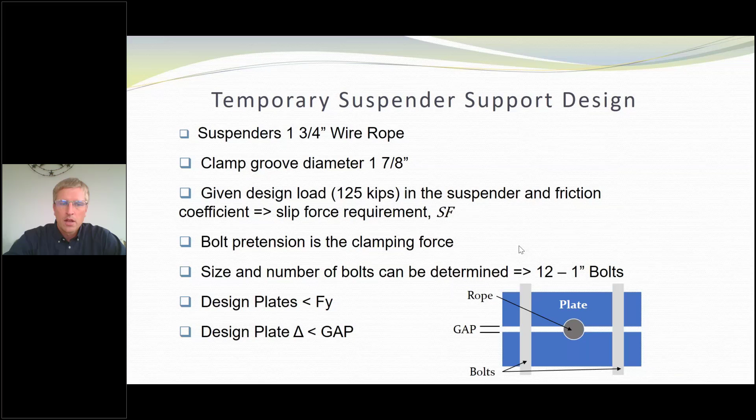Design—I won't go into further detail, but I did want to emphasize again that there is a fatigue concern with this. As you have that clamping force gripping onto the wire or rope, you're going to get additional pinching of the wires, causing additional wire fretting.

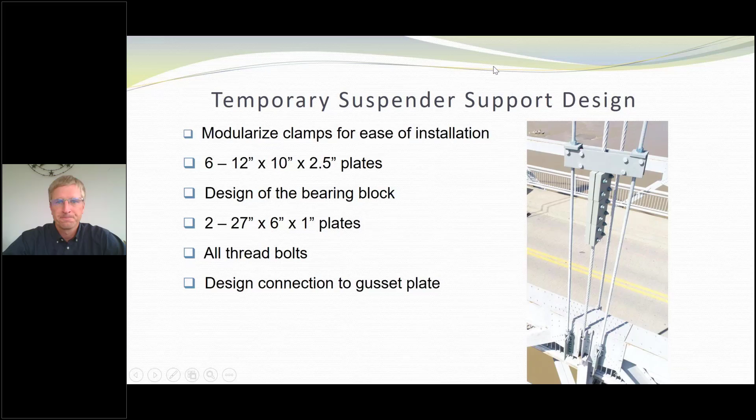While the detail you saw earlier works well for the long suspender cables, the main suspension cable actually sags fairly close to the stiffening truss, nearer to midspan. This main cable is actually 61 strands of 51 wires running through with an outer protective wrap. This was all checked out years ago—we also opened up a few of the hatches to assess the cable as part of this, and they turned out well.

The next thing that Blake showed earlier and talked a little about is the cable bands. These loop over the top—there are 131 of these cast steel cable bands, one for each of the suspension cables, at various angles and degrees.

I think it's interesting to note that these are detailed on 1/4 of one sheet of the original plan set. To have that many different castings all come out of one 1/4 of one plan sheet is remarkable. Those old guys knew what they were doing.

For the shorter suspension cables, where you couldn't get all that apparatus in before, we went with this system. Essentially we put a U-bolt over top of the main cable, then a bent plate with a thin rubber sheet to help distribute the load and make sure we're not pinching any of the wires protecting our main cable. Then we have another bearing block, with all-thread coming down to the main cable. So this was the detail.